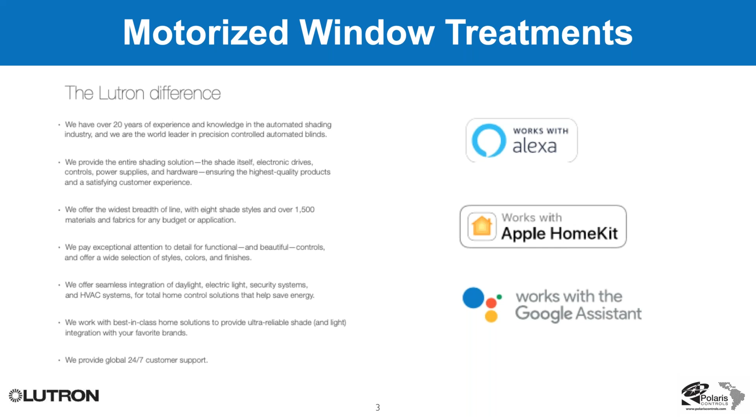Additionally, Lutron provides 24/7 customer support worldwide. We're also here as Polaris Controls, as well as our friends at Audio Video Export.

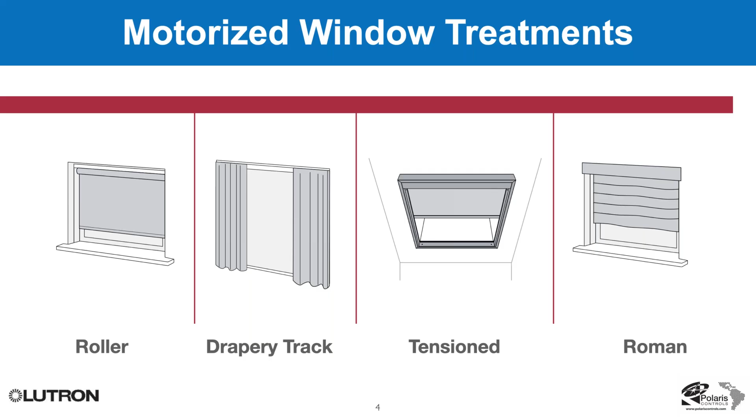In the motorized window treatment world, we're basically going to talk about four different types of systems. I'll start with rollers, continue with Drapery Track, then tension and Roman shades, and other specialized window treatments as well. So here's the roller shade.

A roller shade is basically comprised of an electronic drive unit. Notice I call it an electronic drive unit and not a motor, because this device is really much more than a motor. I'd say about 30% of the actual electronic drive unit is motor. The remaining 60 or 70% is really a group of integrated circuits that give the shade a lot more intelligence than a standard motor.

You can be in a room with 60 shades, each with a different motor, and ask the system for all the shades to go up or down. Before they even move an inch, all the drive units talk to each other to ensure they're aligned and fire at the same time. So it's a very aesthetically pleasing product, because it works in sync with the other drives in that room.

So what we're showing here are different options you can have with roller shades. You can have pockets where the shade hides into the ceiling. The pockets are basically a metal enclosure that houses the electronic drive unit along with the actual roller tube and fabric, all inside a pocket that's hidden from view. This makes the installation very aesthetic and really finishes the product well in the space.

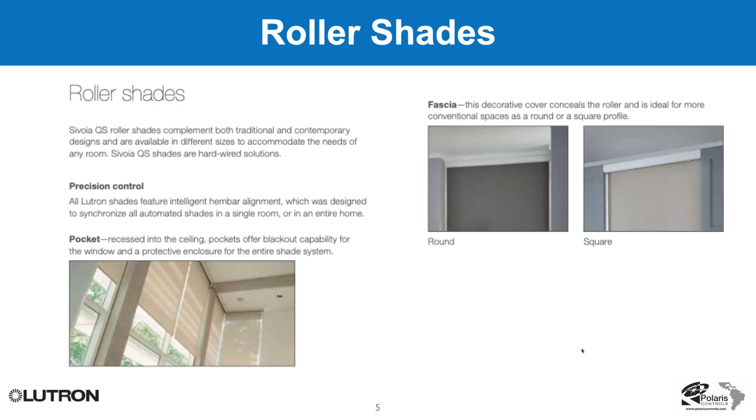It shows the available fabrics that Lutron has across all the different shade types. They're probably updating it as we speak, but you'll see there's all sorts of fabrics there - sheers, translucent, and room darkening fabrics as well. Within each family, you can also find different colored fabrics, different textured fabrics, and different openings of sheer so that you can have the fabric you want.

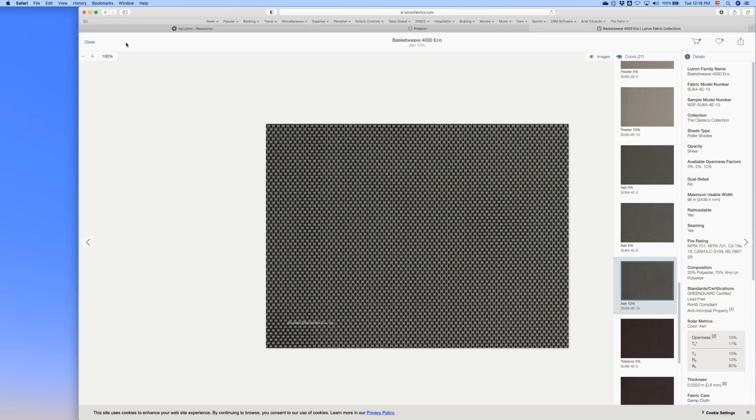So anyways, going back to what you can find here on lutronfabrics.com, you can go through the different types of collections that they have—we'll talk about collections a little bit more later. Within each collection, you can see what's available, select whatever scheme you'd like, and then within that palette select the different types of fabrics with different colors, etc. That's a great tool you can use. It's very simple, lutronfabrics.com. It really makes life a lot easier when you can see the fabric you're trying to select in a project.

So Ariel, anyways, with regard to the fabrics, is it important for the customer—this is a question—is it important for our dealer and/or the end user to know what the fabric is in advance of the quote? Does it affect the quote? That's the basics of the question.

It does. There are fabrics that are costlier than others, so the cost will be impacted by the choice of fabric you select. There are certain fabrics that will impact the cost much more than others, especially if you can or cannot railroad the fabric, and it has to do totally with the physical requirements or physical handicaps that the fabric may have upon railroading.

So totally—and we'll see at the end, we have an hour and a half, Nick, or how long do we have? We've got an hour and a half. Yep, so you'll probably see by the end of this first hour some of the requisites we need in order to be able to provide a quotation that is useful for the dealer.

And then there was a second follow-up to that. What would be your—this is kind of more my question than the dealer's question. I don't know if you're going to be reviewing that later on.

Is there an issue or recommendation? I know there are binders, right? Do you find that dealers with binders are more successful because they've got fabric on hand to share with the customer? Absolutely, because people like to touch more than they like to see. So if a dealer is serious about window treatments, that dealer needs to have fabric binders. Otherwise it's always going to be a last minute thing, like needing something shipped because the interior designer wants to see it, wants to touch it, wants to compare it to other things in the room. So absolutely, positively, binders - we'll show you examples of some of those a little bit later today.

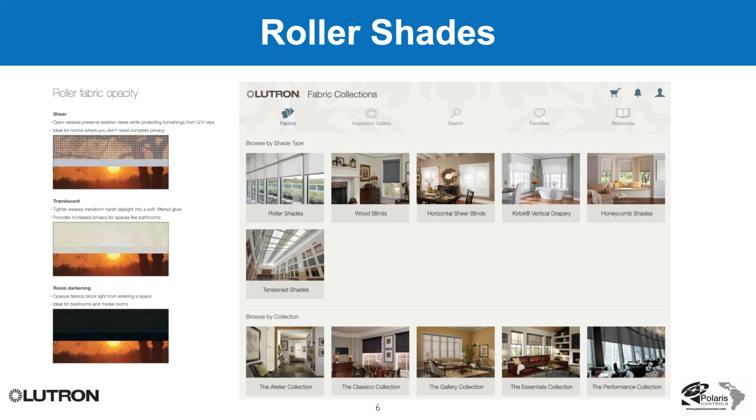Let me go back to this. So again, lutronfabrics.com is an excellent place to get information about what's available. Within the roller family, we have shades that are wired motors, meaning there is a power supply somewhere that needs to power the motor. That power supply can either be a plug-in type right by the shade, a plug-in power supply a few meters down the road, or a panel type power supply that holds 10 power supplies. We can show you some of those a little bit later today.

But there are some shades that are battery operated and battery powered. All the battery powered shades from Lutron are wireless in terms of communication as well. On the left here you see the compartment where those batteries lie. Lutron exclusively uses battery powered shades with one-use batteries - no rechargeable batteries, no rechargeable battery kits. It's a D-size cell battery that lives inside a motor assembly somewhere. In this instance you can see it's showing 4 Duracell D type batteries. Some of these shades can hold up to 12 of these batteries - the bigger the wireless battery powered shade, the more batteries it's probably going to take.

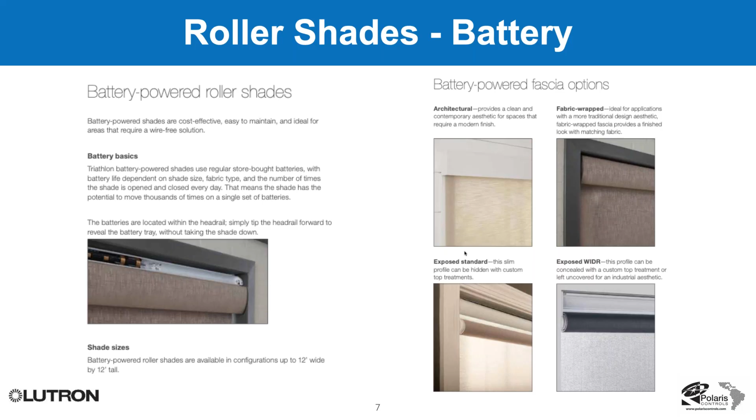So that's a great opportunity to match a very simple to use, simple to install shade to a Caseta system. Now, Serena has some limitations with the amount of available fabrics and available drive units you can put on it. But for most applications, Serena can cover a lot of territory if you don't have to integrate it beyond a Caseta type system.

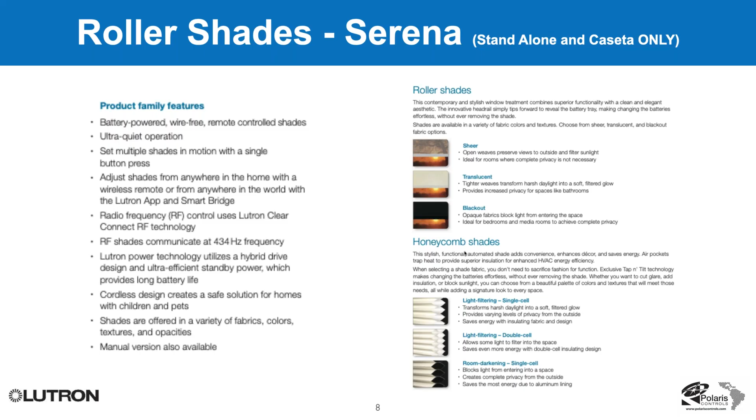There is a second version of Lutron battery powered shades called Triathlon. Triathlon can work standalone, with Caseta, with RadioRA 2, and with a system called HomeWorks QS from Lutron. It's essentially the same thing the Serena product can do, except it can do much more—it can do larger roll sizes, more fabrics, and other types of applications that a Serena product simply does not do.

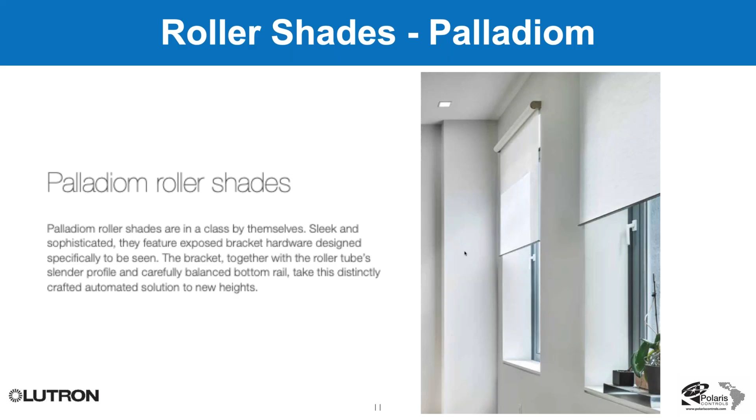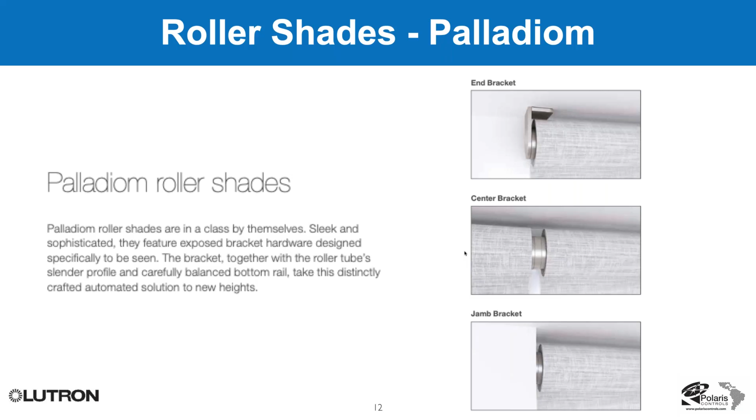You can see the end, center, and jamb brackets for Palladiom. As you can see, it is a fully exposed shade—there are no pockets for this. It's totally exposed in its industrial design.

The nice thing about Palladiom is that it also has a complete family of controls and thermostats that bring together the whole industrial look. You can match, for example, the metal color and finish of the bracket to the metal finish of the keypad and the thermostat as well. So think of Palladiom as a specialized, more costly alternative to a Lutron shading system that gives you exposed hardware and matching keypad and control capabilities.

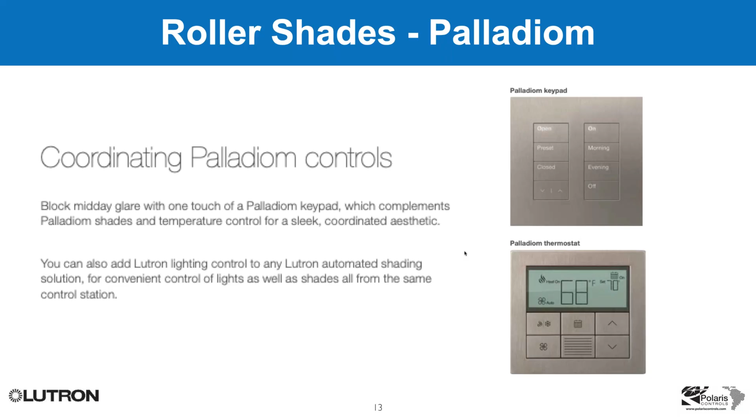Lutron also has something called Sivoia QS Wireless. It is wireless in how it communicates with the control system, but it is not a battery powered shade. It is powered by power supplies that are either plug-in, junction box mounted, or power panel type mounted and centrally located.

Within the Sivoia QS family, other than the rollers, the difference between the Sivoia QS wireless roller and the Triathlon or Serena is that they have a power supply, not a battery powered one.

If we look at the Drapery Track, which is an option within the Sivoia QS family, you have the ability to install the track and motor for the track, and then add whatever fabric you want, as long as you don't exceed the capacities of the Drapery Track and its motor.

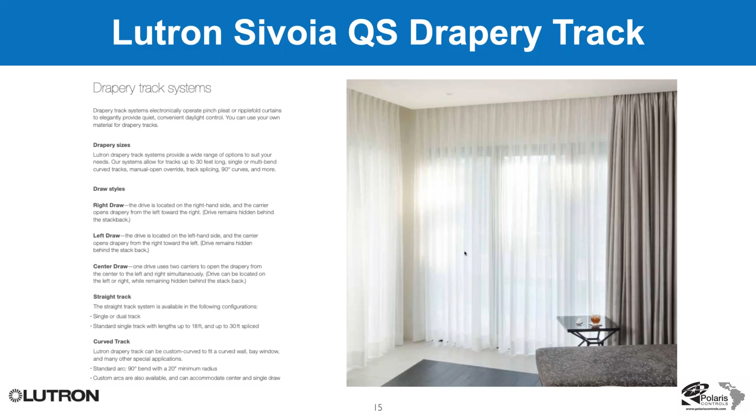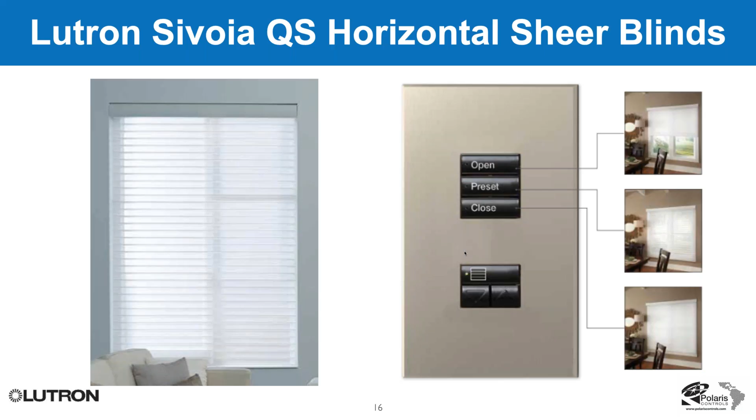Lutron has another product called the horizontal sheer blind. This has two motors inside: one allows you to bring the entire shade up and down, as you can see on the right side of the screen where the shade goes all the way up or down. You can also tilt the fabric for more or less privacy, similar to the next system, which is a wood blind system.

Lutron does have motorized wood blinds. Again, it's a two motor configuration: one motor brings the entire blind up and down, and the second motor tilts the wood slats on the blinds.

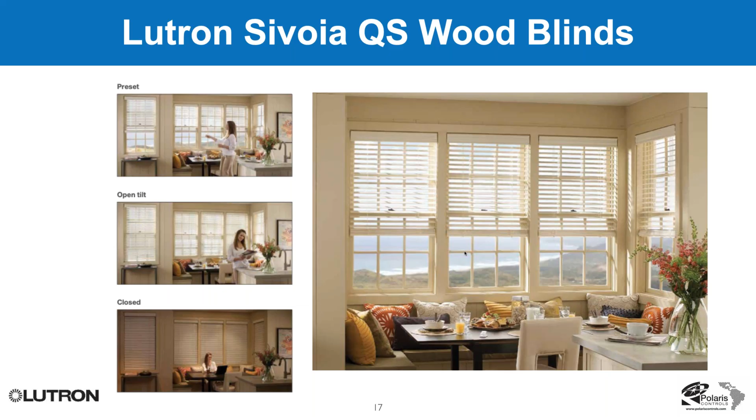This is a specialized type of drapery, a vertical drapery, meaning the fabric looks like drapery fabric, but instead of opening to the sides, it goes up and down. It comes with its own valance, or you can have a custom valance made. The valance is the top treatment you see on this motorized window treatment. It gives you the drapery look, but without the draw to the sides that the Drapery Track requires.

So where do you use this? For example, if you have limited space on the sides of a window and don't want all the stack back of fabric to one side, and you'd rather have a clean look, that's where Kirbé comes in, because the drapery goes up and down instead of to the sides.

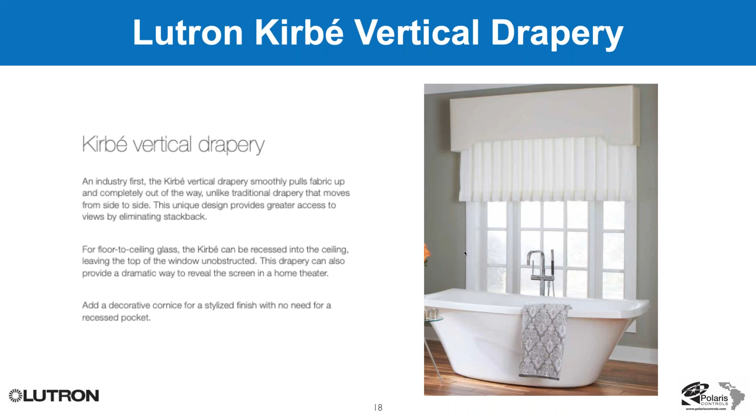Here's another specialized window treatment system called a Roman shade. Lutron provides a motor and mechanism to allow the fabric to go up and down. You can provide and install the fabric on site to this motor assembly. This is very popular with interior designers who want more control over how a project looks. You can provide them with a Roman shade type system, they select the fabric, and you install it on site.

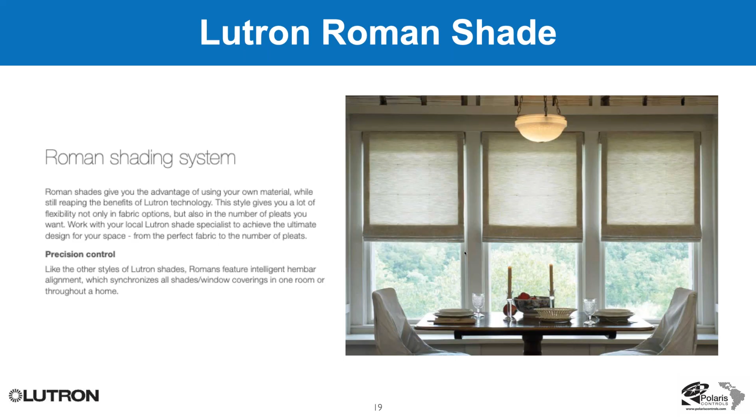Finally, we have a very specialized shade system called a tension shade. What's really happening here is there's essentially a motor that's pulling a string, and depending on the direction of where that string is going, it's going to create a tension shade to open or close.

We can do this with a window where you'd like to have the roller on the bottom of the window, and just have the fabric go up to close and down to open. That's a popular use for showers, where you'd like to have the fabric on the bottom of the window and have light coming from the top of the window and not the bottom itself.

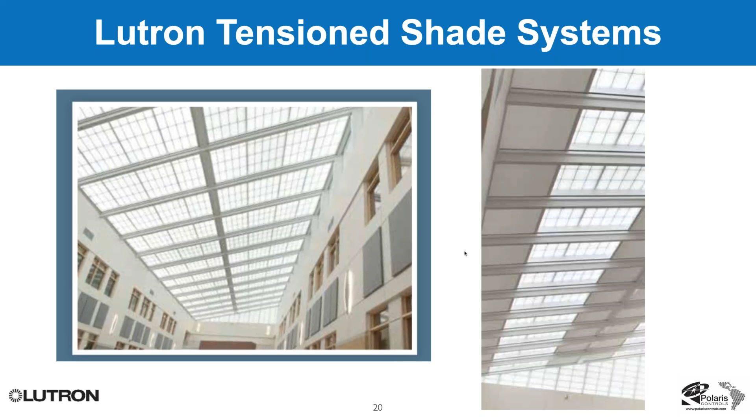So those are basically all the systems that Lutron has for their window treatments. We have roller, we have wireless rollers, both in the Serena and in the Triathlon side. We have wireless from a communication perspective with the Lutron QS wireless option. We have drapery tracks, tension shades, horizontal sheer blinds, and wood blinds as part of the family. So Nick was alluding to this.

My recommendation would be to at least have the Classico collection binder as part of your marketing tools. The second one I would recommend is the gallery collection. The third would be the Atelier collection, and the fourth, if you do come into honeycomb projects, would be that binder. So in order of progression, I would have Classico, then gallery, then Atelier, then honeycomb. That's my personal opinion.

So right now I'd like to exit the presentation and show you some additional tools that we have.

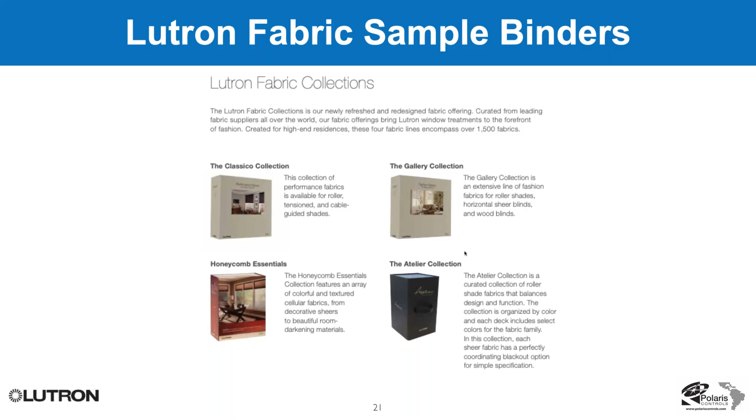So these are some of the handouts that we have available. Let me take a look at the handout that you have. So the first one that you have listed there is this one.

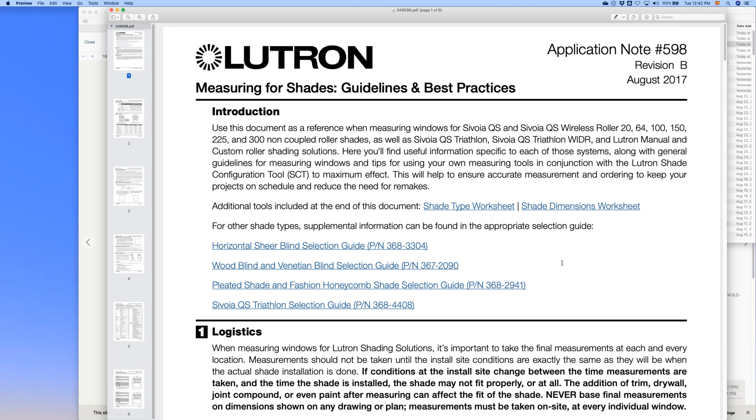So this one shows you the measuring guidelines and best practices for shades. Look at point number 1. This is very important: measurements should not be taken until the install site conditions are exactly the same as they will be when the actual shade installation is done.

This means that by no means or circumstance should you place an order for shades if you have not measured what the final condition of that shade is going to be. Don't place orders based on drawings, because 99% of the time the drawing will not be the same as the actual installation condition. Don't place orders when you have a building under construction that has not completed the trim out, because that's when you're going to find yourself with errors.

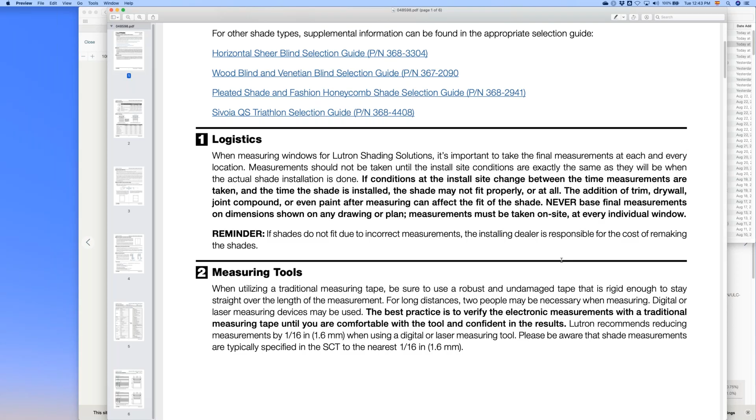So logistics is number 1. Number 2, measuring tools. We recommend that you measure with a tape measure as well as with an electronic tape measure. The best practice is to verify the electronic measurements with a traditional measuring tape until you're comfortable with the tool and confident with the results. That means if you're using an electronic tape measure, you must use a traditional measuring tape just to make sure you're comfortable using it.

Okay, so I wanted to go through those two because those are the most common mistakes right there.

So space requirement: this shows you for roller type shades. The roller 20, 64, 100, 225, that really pertains to the square footage of fabric that particular roller is going to use. As you can see here, the height and depth of the mounting of a round roller is going to be the same because it is a round piece. It becomes different when you have dual mounted roller shades.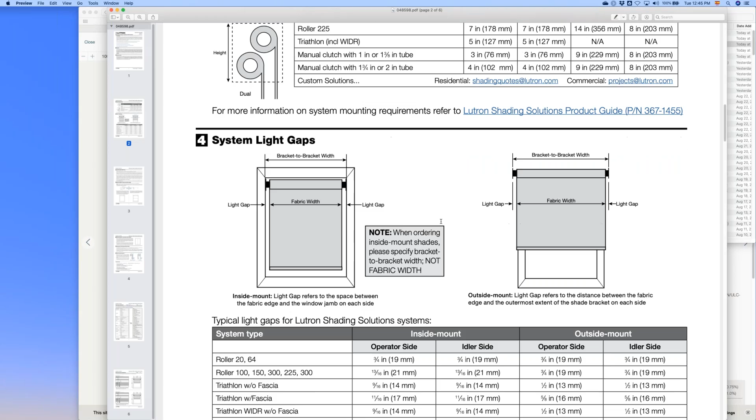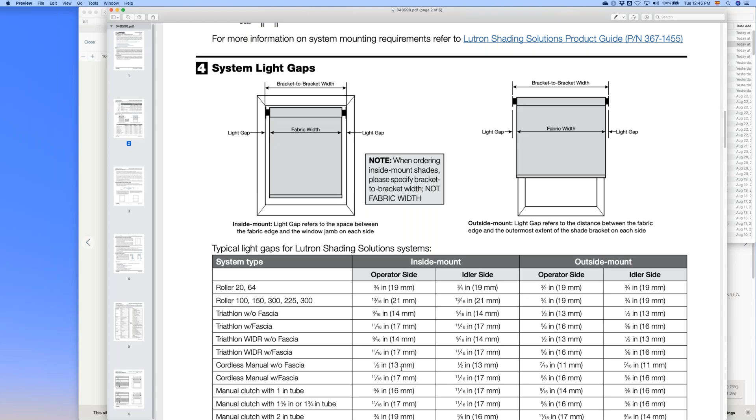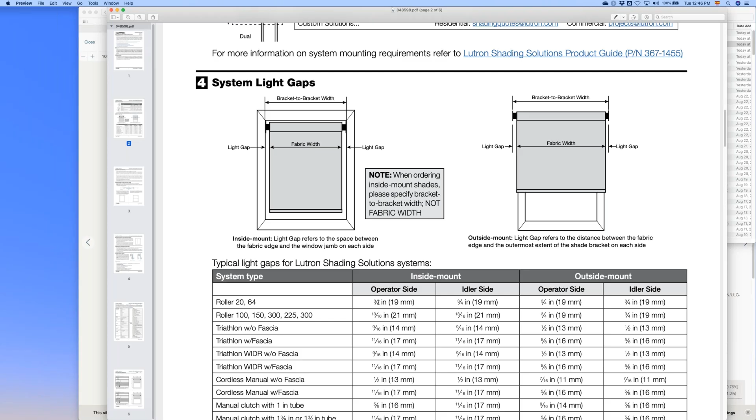The light gaps, you should also note, are going to be probably about 3/4 of an inch on most installations. It's going to be a little bit more on certain installations and a little bit less in others. So here's the thing you need to consider with light gaps, which is the space between the fabric and the end of the bracket. You can see that the bracket to bracket width is always going to be larger than the fabric width in these types of installations, and usually that gap is shown here, 3/4 of an inch, 13/16, etc.

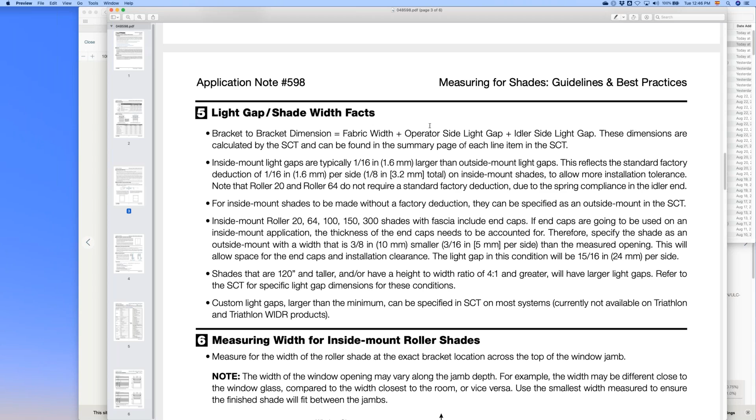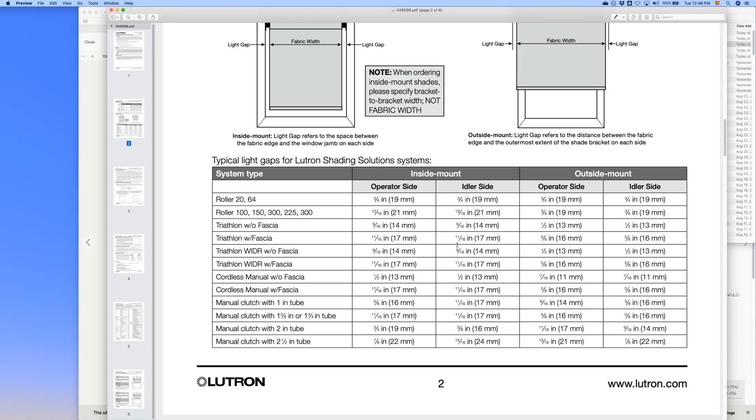So the next thing it's showing you is instructions, and I know that as men we don't read instructions, but actually these instructions are pretty good because it shows you what the bracket to bracket dimension is comprised of. It's comprised of the fabric width, which is here, as well as the light gaps both at the operator side and at the idler side. So that gives you the bracket to bracket width. That's something you need to take into account if you're installing within an inside mounted window jamb.

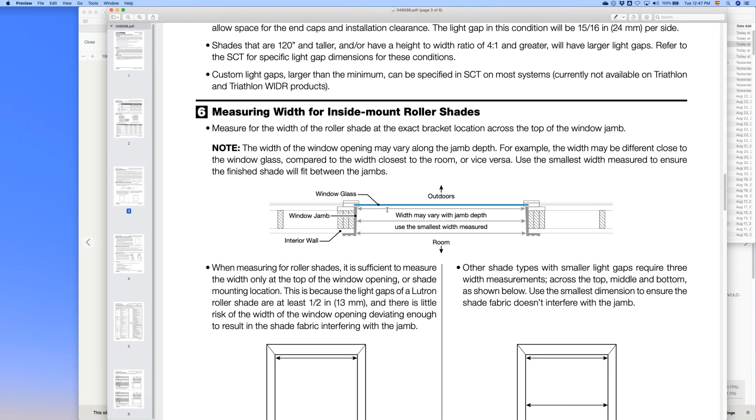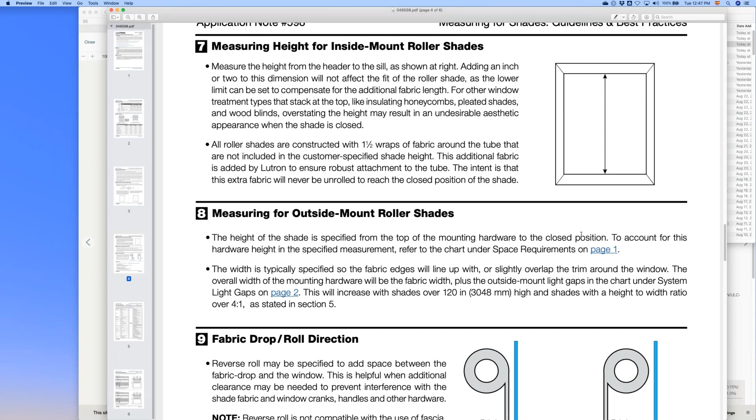So here it's showing you how to measure the installation with the jamb. This is showing you how to measure for height on a roller shade, for inside mount, for outside mount. This is showing you what fabric drop or roll direction looks like.

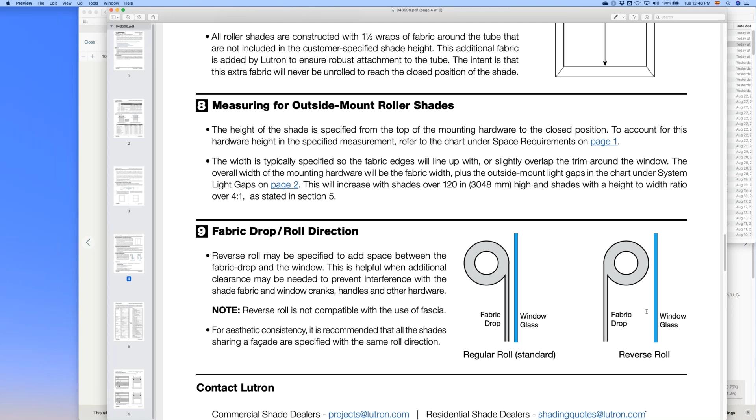On a regular roll, the fabric goes up and down closest to the window pane. On a reverse roll, it goes in reverse, further away from the window pane. Where would you use something like this? Well, if you're installing a roller window treatment on a door and the door has hardware, let's say the doorknob is right here, you don't want the fabric to go up and down by the window glass because it's going to go onto the hardware. So that's the first document that I wanted to show.

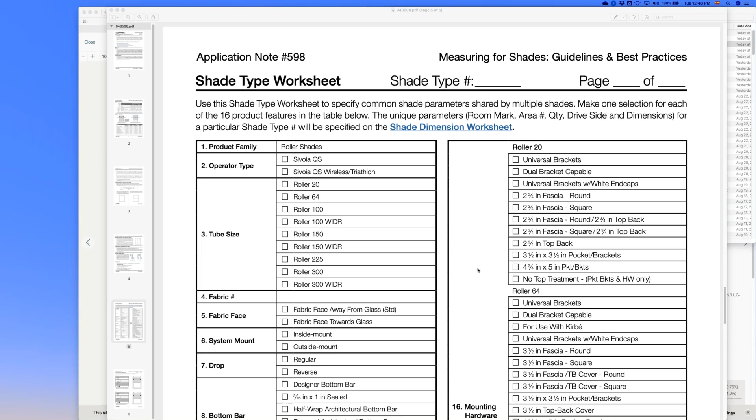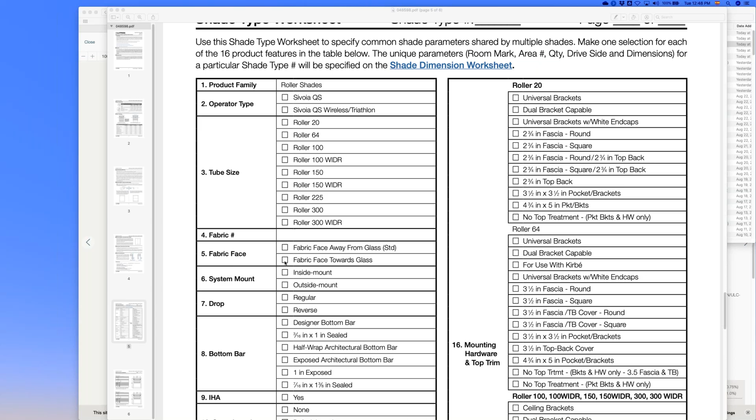The second one, or actually in that same document, you can look at all the different requirements that you need to measure and just use this as a checklist. So you select what kind of operator you're going to use, either wired or wireless, the tube size you're going to use, the fabric number, the fabric face, system mount, drop. I'll show you why this is important, because when we use the design tool that I'll show you in a few minutes, you'll see that these same requirements are on that tool as well.

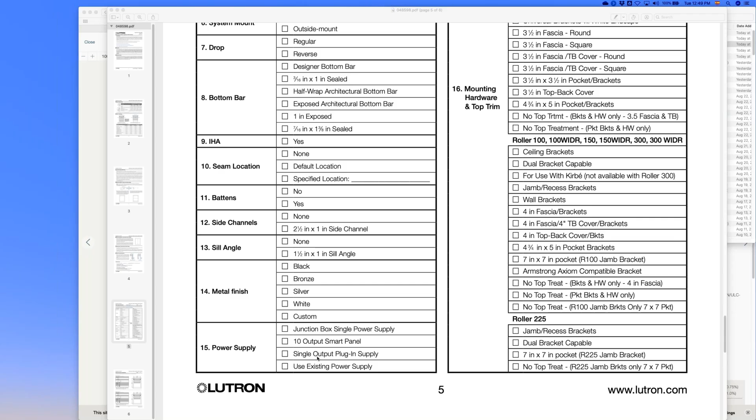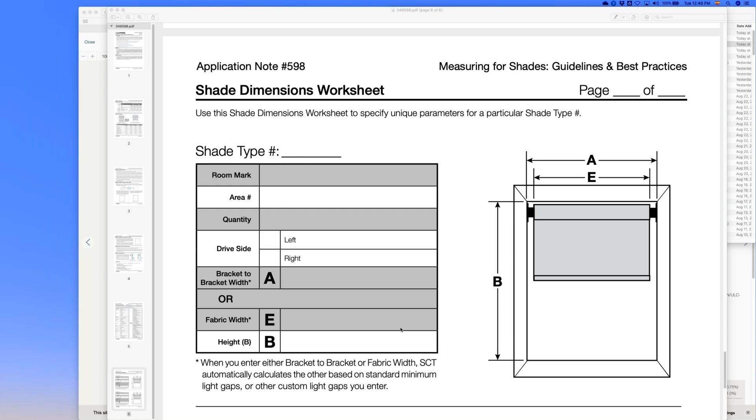So if you're using side channels or battens or seams, where they're going to be, if you're using a power supply because it's not a battery powered shade, what type of supply you're going to use, etc. This is how you go room by room: the name of the room, the area, how many you need, what side the drive of the window treatment is going to be on, the bracket width, and it's showing you A, the fabric width, which is shown as E, the height, and it gives you on one page just two in case you need to measure.

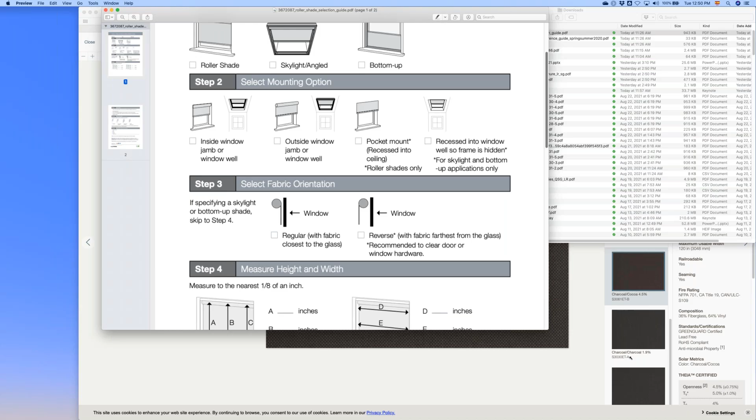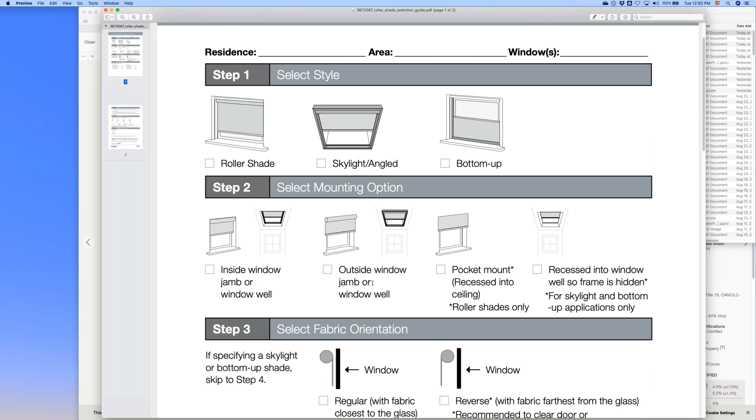So this is really for roller type window treatments. The second handout that you have here is the roller shade selection guide. So this is showing you the roller shade, and in the roller shade you have the one we talked about before, the skylight or bottom up, which are just tension shades, how you're going to mount them inside the jamb or outside of the jamb, if it's going to be a regular roll or reverse roll, and this is showing you how to measure.

In the case of a roller shade, you really want to measure in 3 places, both vertically as well as horizontally.

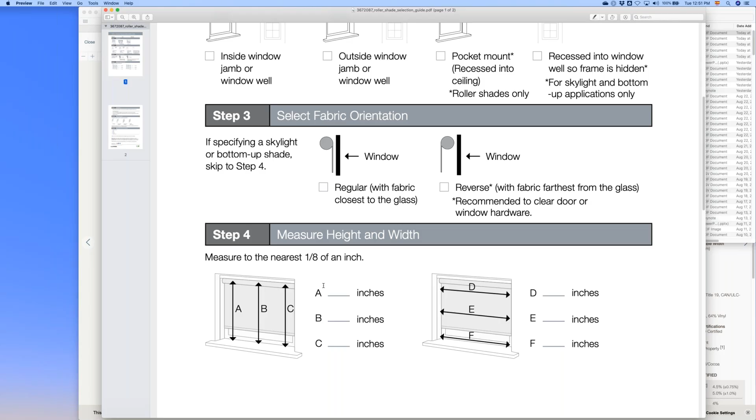On the vertical side, you want to use the tallest measurement instead. So they're opposite: on the vertical, you use the tallest one, and on the horizontal one, you use the shortest one, to make sure the fabric will go up and down with no problems.

Now, the reason I'm showing you this is because if we go to the actual tool that we use for the ordering process, I'm just going to make up a project here. I'm going to add a project - the project name is going to be AVE Webinar.

Home. The name of the space is going to be the living room. It's in the design phase. The description is example for the webinar. Where it's located, who did it, what the job type is - I'm going to say it's education.

Who's the primary Lutron influencer? Let's say it's going to be Nick Muro - I'm sure I spelled that wrong. The estimated close date, just to put something on it, let's say the 14th of October. And if I'm going to use imperial or metric - I prefer metric, but I know there's a few places in the Caribbean that use imperial, so we can use imperial.

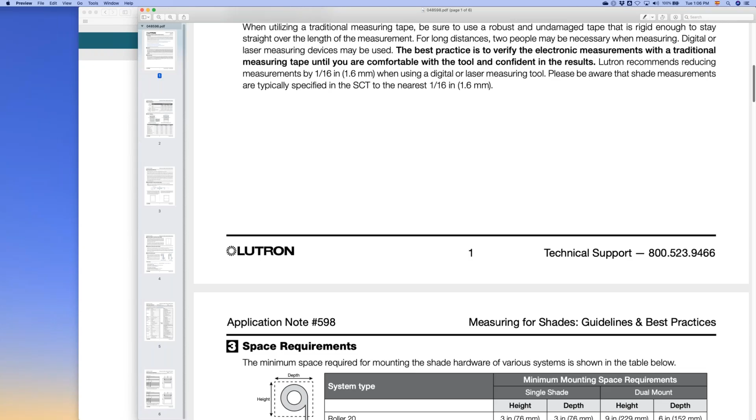I do want to stress, though, if anybody is going to be typing any additional questions, the forms that Ariel reviewed with us—I don't want to be a downer, but it's really important that we get all of the relevant information on there. One of two things is going to happen: either we are going to reject the form and not be able to complete the quote, which is going to frustrate everybody because you just want to get your quote, and we want to be able to do that for you. Or number two, you're going to get something that you didn't really want.

And what ends up happening is that at the finality of the quote process creation, Audio Video Export, your salesperson is going to have you initial every individual page of that formal quote, and we're going to keep that on file.

If you measured with a digital tape measure and you are not absolutely 100% sure that the measurements are accurate, and it's off by a quarter of an inch, you're going to get the wrong product. Neither Polaris Controls, Lutron, nor Audio Video Export will be responsible for that, because we're not the ones doing the measurement.

Now, if Lutron manufactures something incorrectly, that's different—we'll handle that as needed. But if it came out exactly as your quote came and you initialed on that, bear in mind that's going to be your responsibility. It's not a big deal, it's just that these can be very expensive, and we want to avoid any and all mistakes if at all possible. Is there anything else you wanted to add on that, Ariel?

Yes, it is extremely important. I can tell you that on your first window treatment job, you will probably have an error in measuring, I guarantee it. But that will be the only error you'll ever make, because you'll learn from it. It's not like buying a Pico that's the wrong color or has 3 buttons instead of 2—you're buying something that comes in a box that's probably 8 feet long. So you will remember the mistake you make on your first order and not make that mistake again.